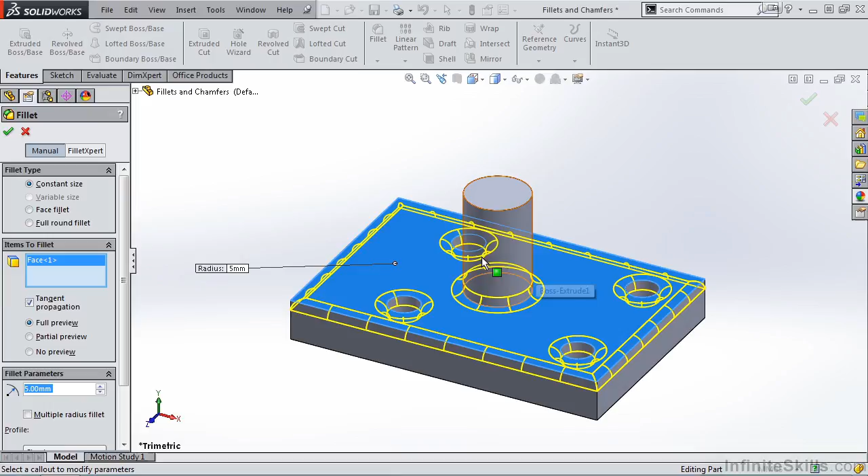Now I do have a choice. Instead of working around the edges, I could have selected this face. So let me clear this window, and this time I'll select the face, and you can see the difference as far as the results. It also filleted the 4 holes along with the bottom of the cylinder. I'm going to clear the window one more time and show you what happens when we select edges.

When you are in the fillet command, even though an edge may be hidden from you, the fillet command allows you to view that edge through the solid part, like you see here. I'll select the 4th edge, and there's my fillet. I'm going to work around the part and select the 4 edges around the top face, and then close out of the fillet command. Now notice in the Feature Manager tree, we do not have any plus sign in front of the fillet feature because the fillet feature does not require a 2D sketch.

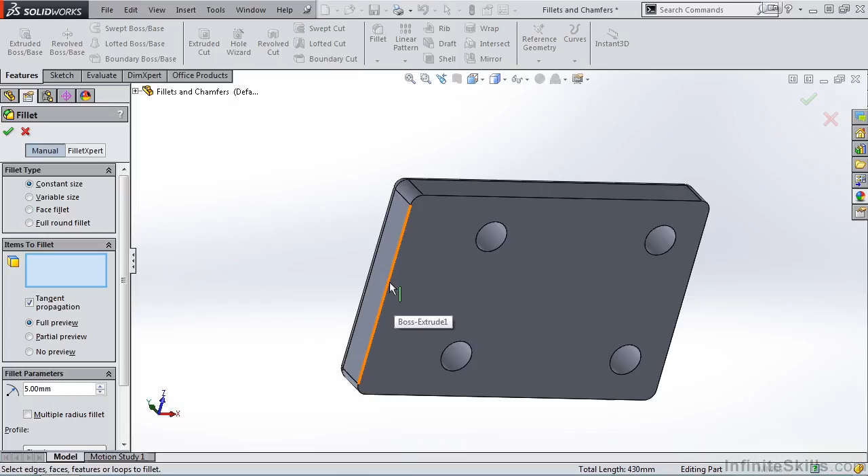Let's go back into the fillet command, and this time we're going to take a look at the bottom of the model. Notice we have a checkbox in front of tangent propagation. When you go out and select an edge, if it finds tangencies, and this box here is checked, it will place a fillet around that perimeter. And because these 4 corners were tangent based on the earlier fillet, it followed along that path until we get back to the point that we selected. I'm going to close out of this, and you see another fillet added to the Feature Manager tree.

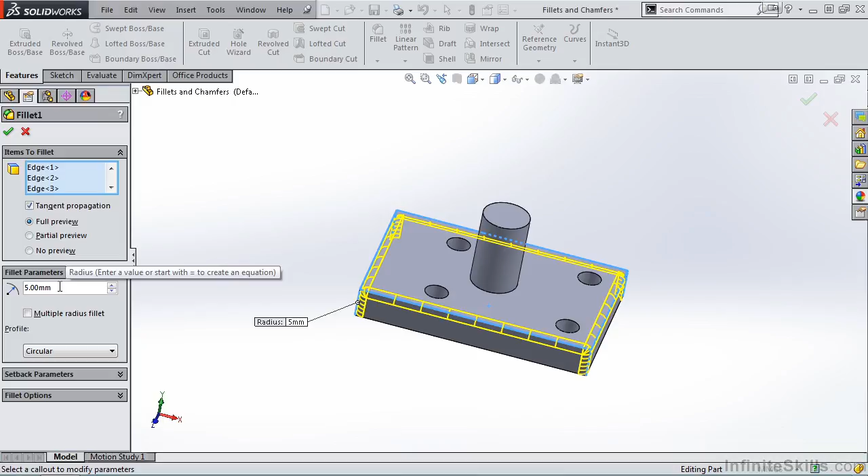Now, I'm going to delete fillet 2 and edit fillet 1. Notice when I edited fillet 1 and when I placed fillet 1 on this part, I receive 1 tag. Now I can change the size of this radius back in the Property Manager, or I can change it in this tag. So I can type in a radius of 3, enter, and the preview updates.

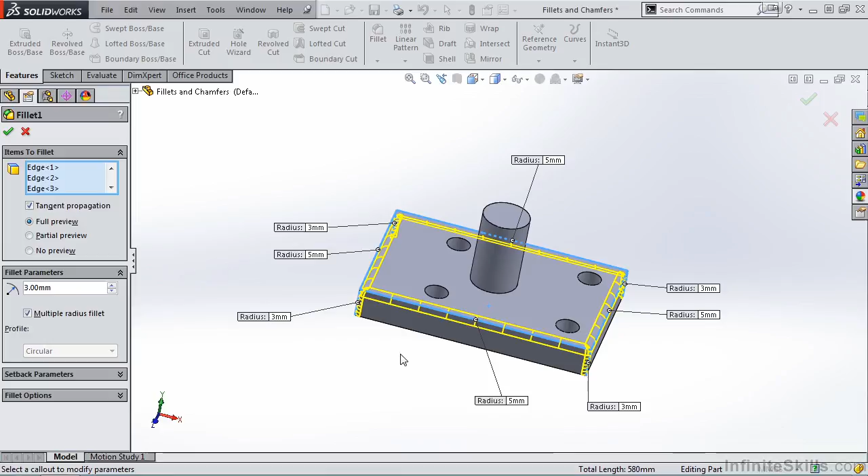Now notice I have this checkbox for multiple radius fillet. If I put a check mark in here, it will give me a tag for each one of the fillets, allowing me to change those fillet sizes individually. So I can change the size here, for example, to 5mm. And let's do the same for the other edges. All within this one fillet command. So that's pretty handy. I'm going to close out of the fillet command, and you see a 5mm radius along the top edge and a 3mm radius for the 4 vertical edges. I am going to delete fillet 1.

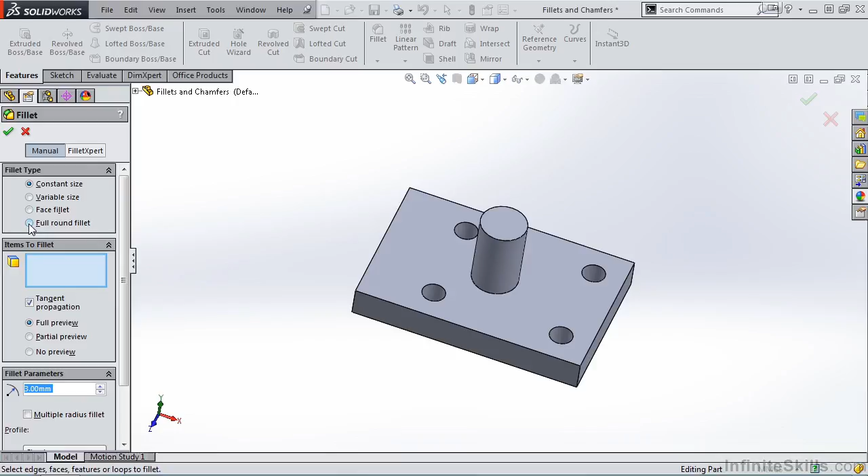I'm going to go back into the fillet command, and this time let's try full round fillet. Now you'll see as soon as I put a mark inside of this radio button, the property manager below that point updates. And there we have 3 windows. What we're going to do here is place a full round fillet between these 3 faces.

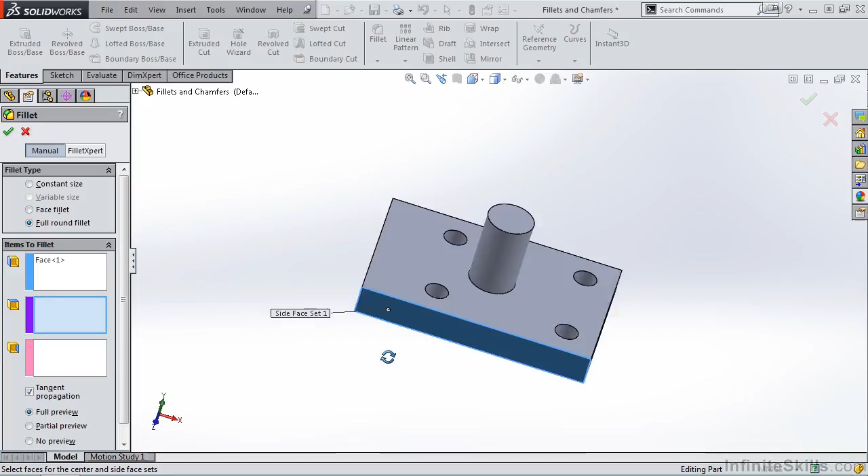So inside of the first window, I'm going to select this face. You want to make sure you return to the property manager, activate the second window, roll the model, select the second face. Go back to the property manager, activate the third window, and then select the third face. And you see a preview of a full round fillet.